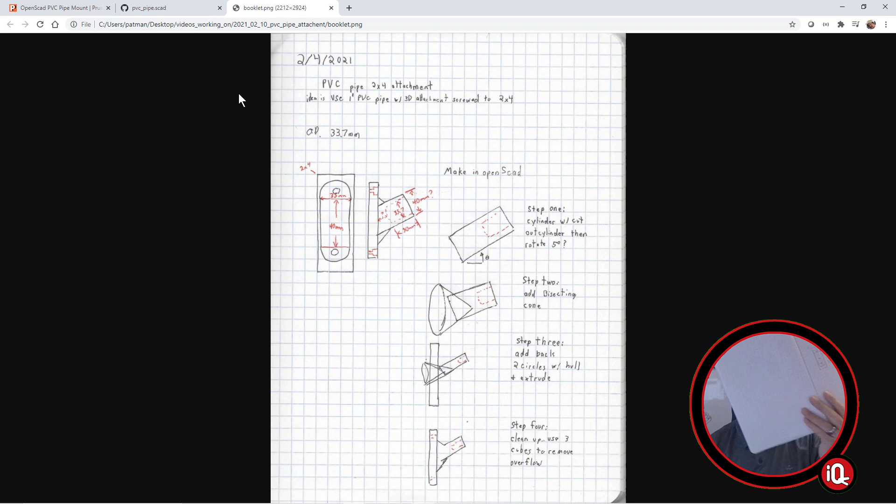So always, I think I've said a few times, draw some ideas in a booklet, keep track of them, because I think it helps you with your timing. When you're trying to design something, it can save you a lot of time, kind of give you an idea. So in this case, I was actually trying to plan out how I'd do it in OpenSCAD.

So you can see here, what I was talking about was like, hey, let's do a cylinder at an angle, and then remove a cylinder from inside. But then also, maybe it'll show up better here. Like here's a cylinder, but then it goes at an angle here. I thought, hey, I need some reinforcement. Let me put a cone shape in there, and I'll have that cone shape go through, and then I'll add the backing, and then I'll come back and mathematically subtract the parts.

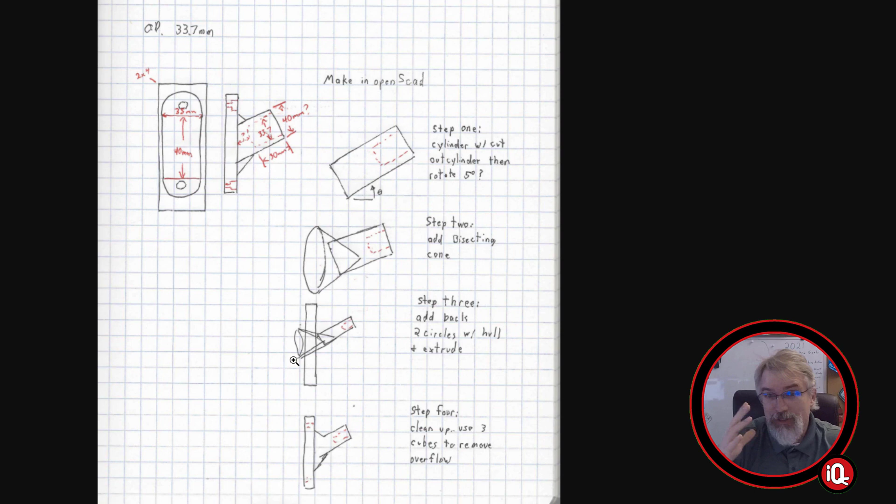And so that's what I did, but it proved to be a little more difficult than I thought, but I did get it working. So I will go over the OpenSCAD at the end here, for those who are interested and want to see how it was all put together. But the OpenSCAD is adjustable, so if you have a different PVC pipe, you could change it. So it should be pretty easy to do that in theory. But with that, let me go over the numbers.

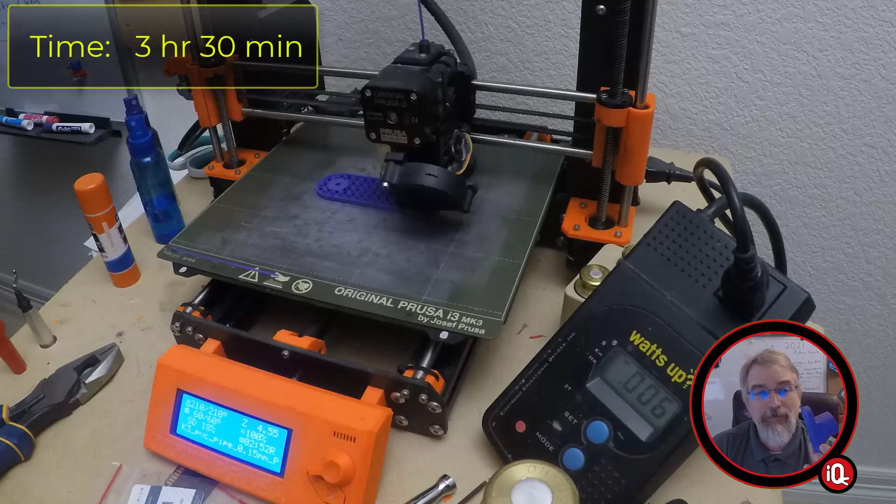So here are the numbers. This took 3 hours and 30 minutes to print. It took 3.2 cents worth of electricity, and it weighs 0.028 kilograms. And at $20 per kilogram, it comes up to 56 cents worth of material. So all in all, it cost 60 cents to print this. So not a bad deal. And I think it's going to work pretty well in my basement. So boom, pretty simple. I like it.

So with that, let me go show off what I can in the basement, even though I don't have the shelves up. I do have an example screwed into a 2x4 on the wall, so I can kind of show off the idea. So I'll go show that off, and after that, we'll come back and show how to recreate it in OpenSCAD. Okay, so like I said, I haven't had enough time to build the shelves I want to build yet, but here's the idea. So I got this.

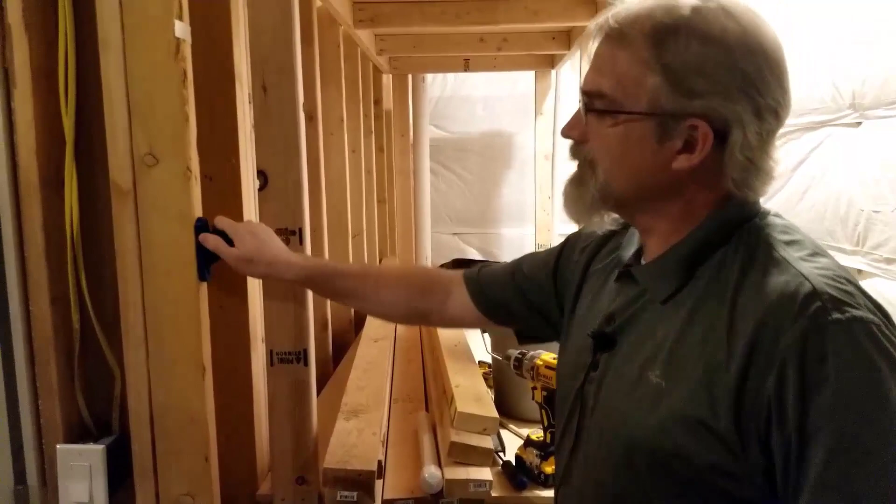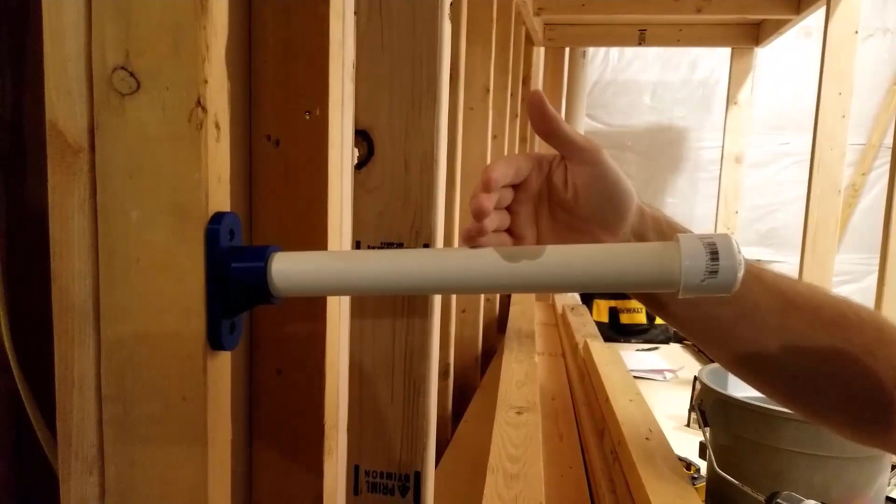The idea is I want to kind of screw these into a 2x4, and then we just can take this and it's nice and tight and firm, and so I'm going to have two of these that I can build. I don't have a good example here, but I have two of these, and I'll put something like this. The other one will hold it up.

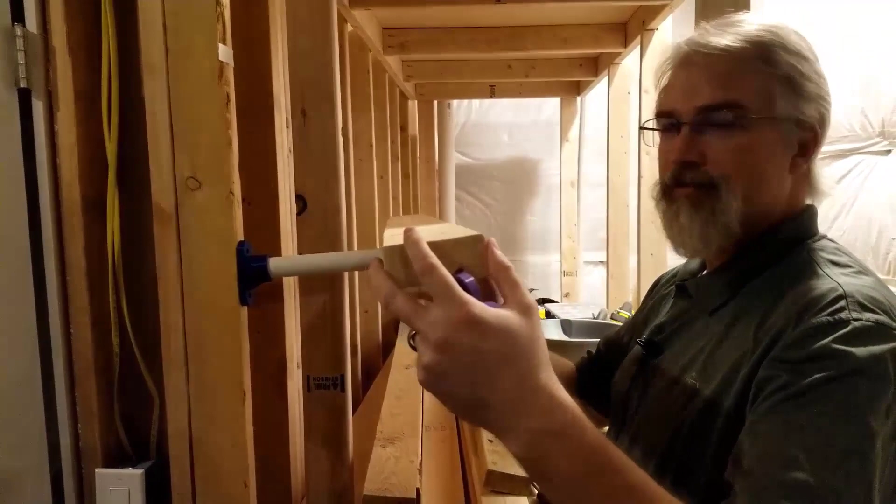Okay, so here is my current OpenSCAD file. So we'll just kind of go over it a little bit here. Now, this is one of those things, if I recall an old story, Osloy, who turned me on to OpenSCAD, sent me something one time, and it was really neat. It did a job I wanted to do, something with putting feet on my 3D printer. But some of the variables weren't perfectly adjustable.

So you could change the parameters, and the design would blow up, because it gets really hard, and I'll show how it gets really hard in this example. I'd have to do a lot more coding to make it universal, where you could make one change and it would adjust everything correctly. Versus what I have here, you can tweak a little bit, but once you go too far, you get out of the parameters of my design, where I did it simply, and it kind of blows up. But I could go back and redo the code and make it more complex to adjust for those things,

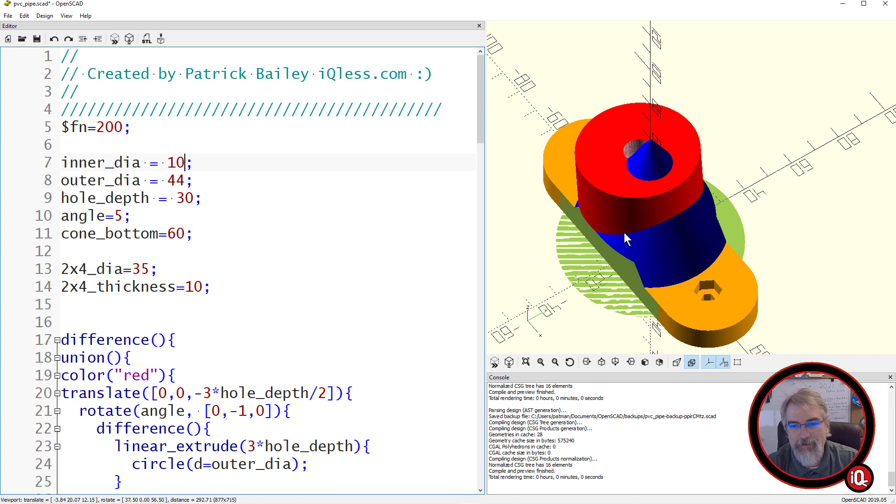but that takes time. So as an example, right here is the inner diameter, 33.7 millimeters. But if I change that, I can make it 10, boom, and we see that goes in here. But now you see that cone. I designed it to cut it off in the middle, but now it's poking through. So I'd have to make this design a little bit different to account for that. I could change the cone size, and the cone would shrink, and there you go. But now I just move the cone. So you see how it starts cascading the error.

So let me go back here. But let's say you were like this, and it looks fine. And let's say you want to go 3/4 that. So I say 3 divided by 4, multiply that. So I do a smaller pipe as an example. And see, that kind of works. But you can see this is still poking out a little bit. Maybe I could adjust this. Yeah, so drop that down to 50, and that kind of works.

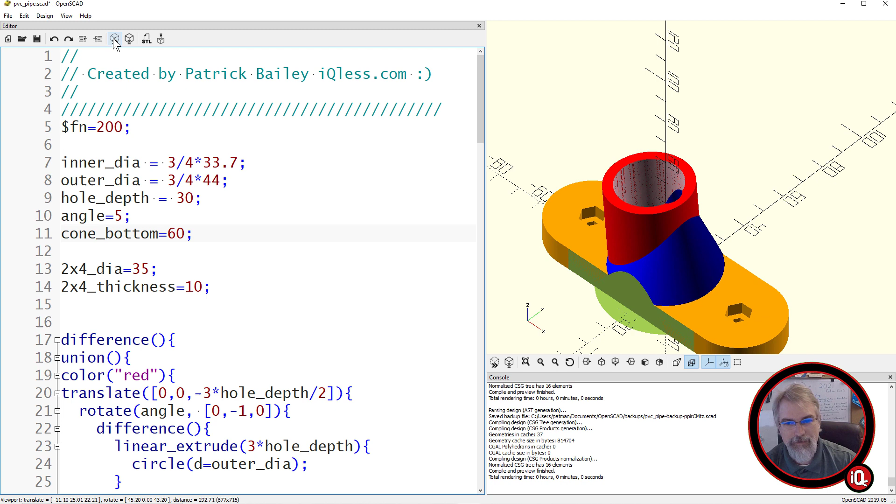So some things you can adjust, but for example, this cone popping over the top, I could have had another feature which cuts that top off, which I didn't do because I just wanted to get the job done. But we could take it as is. Let's say you want to do 0 degrees. That should, in theory, probably work. Yeah, there you go, 0 degrees. If you wanted 0 degrees, that seems to work pretty fine.

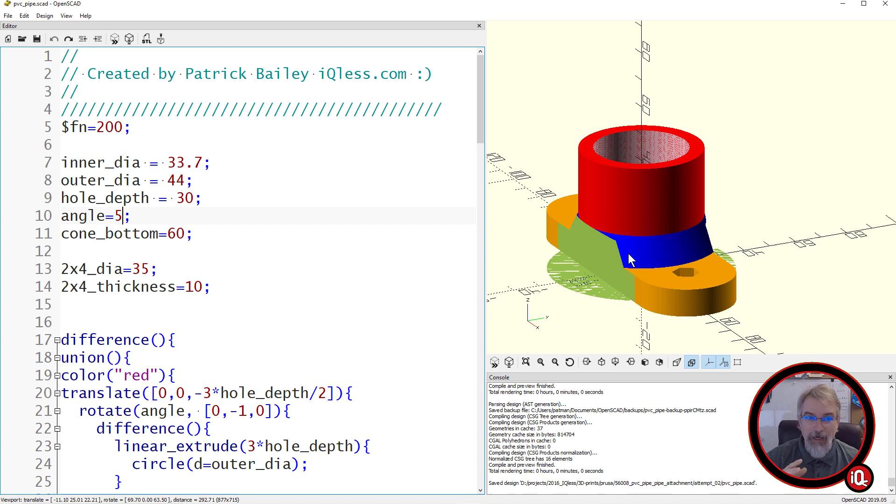Okay, just to show you the complexity of doing things in OpenSCAD. It takes more time to have a full design where you can adjust 3 or 4 parameters and not have it blow up on you. It's possible, but it takes more time. Okay, so with that, let me walk through the idea I had here.

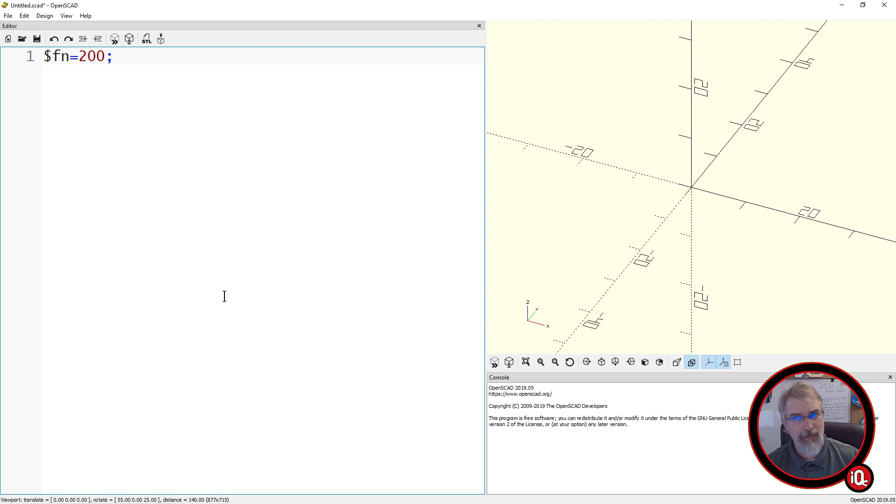One thing I had up here is $fn. For those people who aren't familiar, $fn equals 200. You can think of that as the fineness. Just to remind people, if you're using OpenSCAD, it's a good idea to open up their cheat sheet. openscad.org/cheatsheet should give you the cheat sheet. This $fn 200, that's how fine you want to do it.

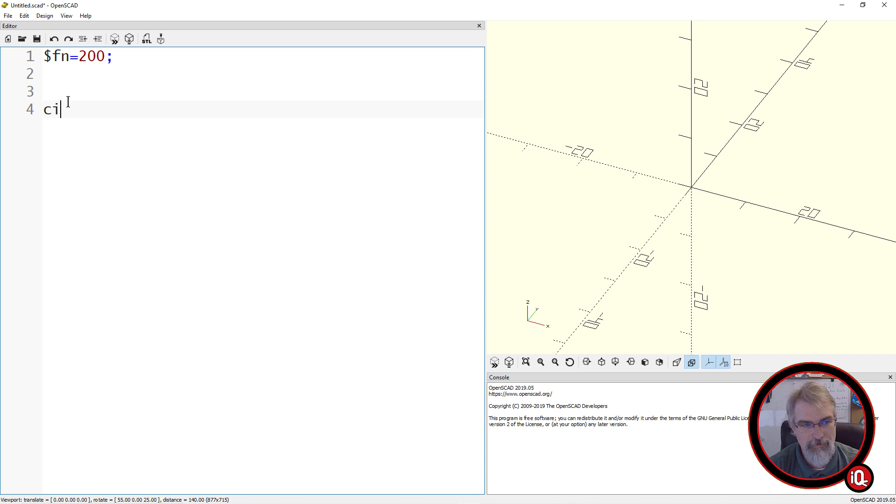So do I have a cylinder on this one? I did not do a cylinder. Let me just do a circle. So if I did a circle of 40 as an example, boom, I get the circle. Now if I drop that fineness down to 10, I got 10 sides.

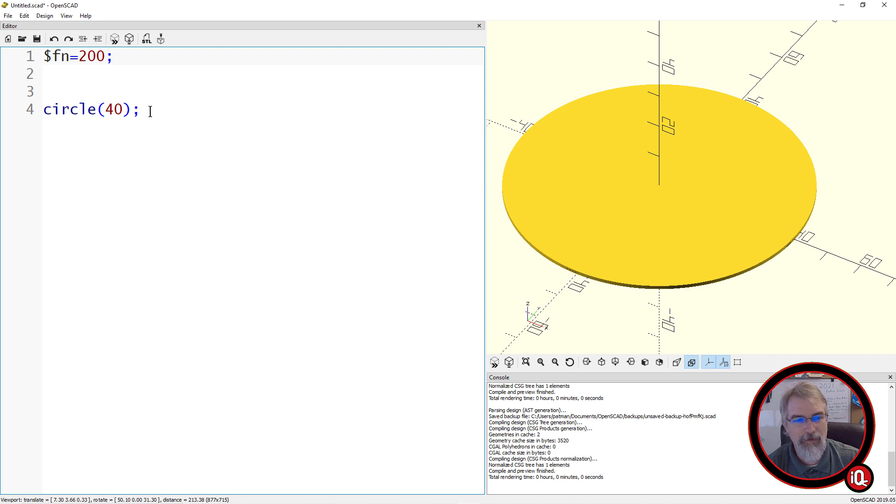So that's, but it takes longer to render. So at some point, you might want to leave this low, like a 10 or 20, if you want to render things quickly. Then when you're done and you're ready to do your model, pump it up to 200, just so you can get that more fine result. And also, per object, you can actually adjust it, which I had to adjust on one thing here.

Okay, so with that, let me get started on a few things. So first, we'll start with the cylinder coming up there. Just to color code these things, I'm going to say color red. So everything inside of here is red. And then we'll do a circle, and we'll say D equals inner diameter. Well, let's do the outer diameter first. Sorry, outer diameter. Well, that's a variable now. We haven't defined it yet.

And we'll come up here and we'll start defining some of these. And so we'll say outer diameter. And I'll just go with the numbers I'm using right now, which is 44 millimeters. Oh, not 2 equals. And boom, we already have an error. So what did I do? Oh, did not spell circle right. It's always a good idea to write a little bit of code, test it, make a change, test it, make a change, test it. That way it's easier to find your errors. Okay, so we got our circle.

The next thing I want to do is we do want to do a linear extrude, because right now it's just 2-dimensional. In this case, I used a variable, 3 times the hole depth is what I decided to do. But you could make it just a number. And down here, I need to make my hole depth. And my hole depth, I said, equals 30. And that's how deep this hole is to go into here. So we run that. Oh, sorry, I did need to do that. There we go.

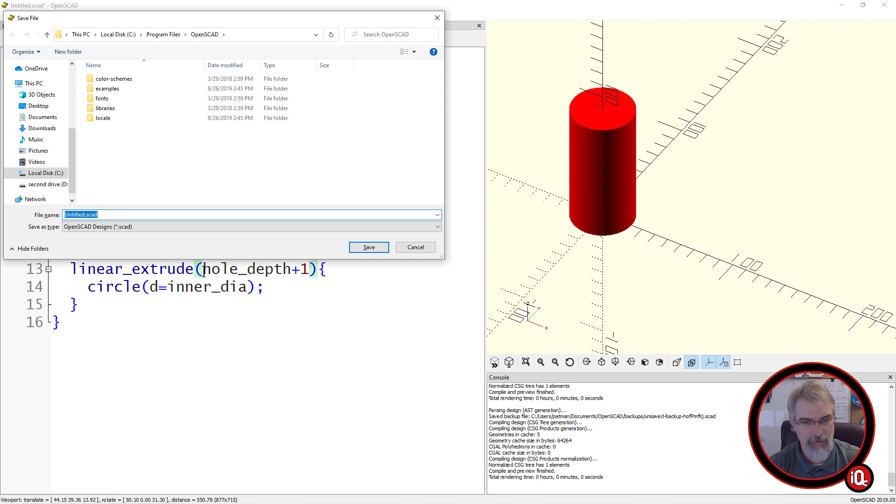And now I have the hole depth. So I'll say hole depth. That's how long I want to make it. But I'm going to add 1 to it just so I can use that to pull things around. Well, let me make it 2. No, make it 1. 1's fine because that means I'll just go above. Okay, so now if I run it, it did make it, but I can't see it because it's hidden inside of there. So now what I need to do is move that. So I'll do a translate, which will move that guy.

Okay, and then this is X, Y, and Z. X, we're not going to move it anywhere. Y, we're not going to move it anywhere. And Z, we need to move it 2 times the hole depth plus 1. Because here we're going 3 tall compared to how I made that hole depth. So here I'm going 2 tall, plus I'm adding 1 little more to kind of creep over the top. So now we can see how it's creeping over the top.

But then now we need to subtract them. So we'll make a difference. And there we go. We got this shape. Now you will notice this is much longer than I made, because my intention was to make this too long and then pull it back and angle it and then slice it out. So that's one reason I did this. Okay, so now the next thing I need to do is rotate it. So we'll say rotate, and we'll rotate this whole thing in place.

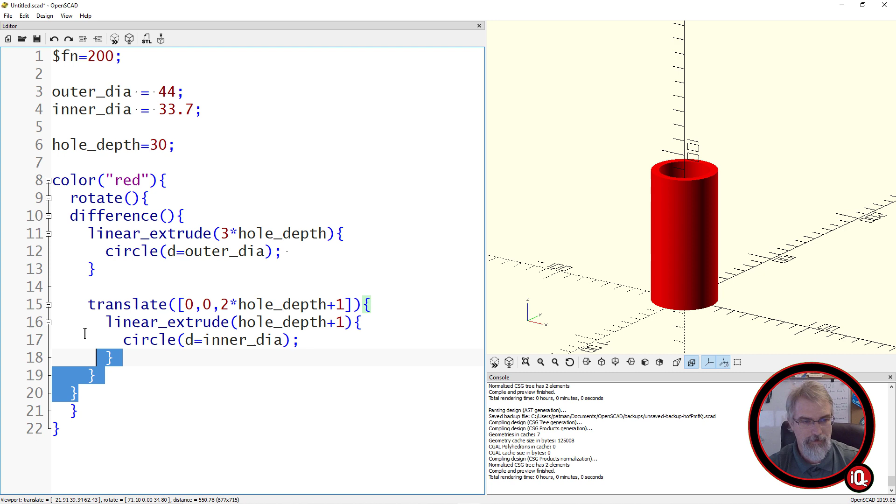Boom. Okay, and this is where it gets fun. So we can say angle, so how much we're going to rotate it. And then you can rotate this in different dimensions. You can do X, Y, or Z. So we don't want to do it in X, so we put a 0. And we do want to do it in Y. In this case, you put a 1 or a -1. Maybe you can do half variables, I don't know. And Z, we don't need to move it.

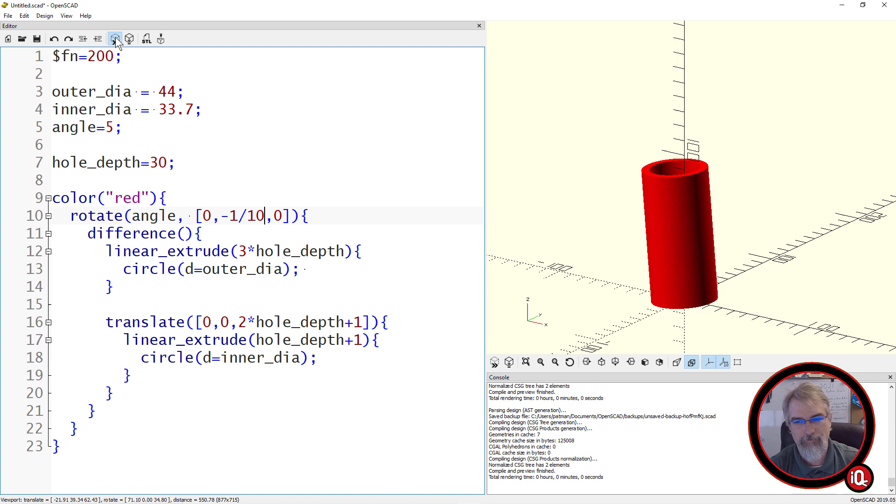So then come up here, we need to actually put our angle in. So I'll say angle. That way it's easier to change. Angle's 5. Boom. We see that we rotated the whole thing. Now if I did a 1, it would just go the other way. Boom. Now, can I do... never tried it, -1/2. Is it going to just do a little bit? Or it doesn't matter? Okay, I guess as long as there's a negative or positive value, that's how it works. Just never thought about that.

Okay, now we need to move this. So I need to move it down. Translate. Boom, boom, boom. Okay, and we translate it 0, 0. I need to move it down. I'm going to move it -3 times the hole depth divided by 2. That's just the number I came up with that made me happy. So now that pulls that down. Okay, so now that part is done except for the slicing of it.

So the next thing I want to do is we want to create the cone. So I'll go down here. And the cone is just going to be a simple cone. So we'll say color. We'll separate it in different colors. We'll call it blue. And then, did I write this one? Okay, we use the cylinder, cone bottom. That's how big the bottom of the cone is. And then how high it's gonna, let's see. Let me bring up the cheat sheet because I think I'm misremembering.

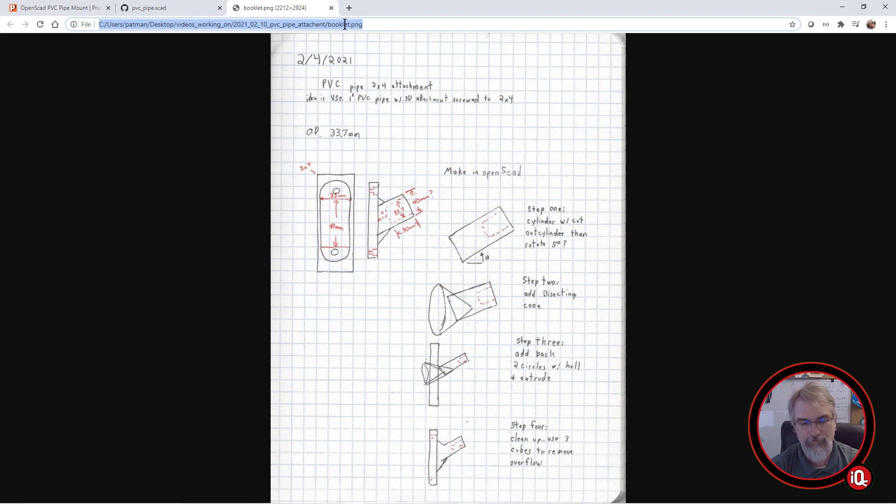Let me check. So there you go. OpenSCAD.org cheat sheet. Cylinder. Okay, and here we have the height, the bottom radius, and the top radius. Okay, so I kind of messed that up. Shouldn't actually be cone bottom. It should be cone height. What are you gonna do? It's not really the radius. Cone height equals 60, I believe. Yeah, look, fixing my own code already, right? And then we have bottom radius and top radius, and whether it's centered.

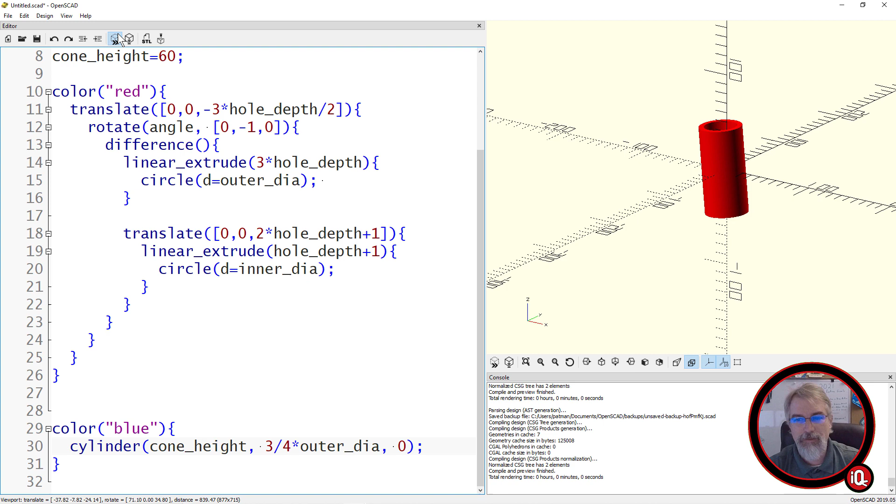So for the bottom radius, I'm saying 3/4 times the outer diameter, I guess is something I decided to do. Who knows why? And a 0 for the top. So it's going to make a cone shape. Big on the bottom, nothing on the top. And we should get our cone there. And you can see it's flat right there, which is fine, but you can see it's bisecting this just fine. And we need to eventually cut that out. So that's going to be a join.

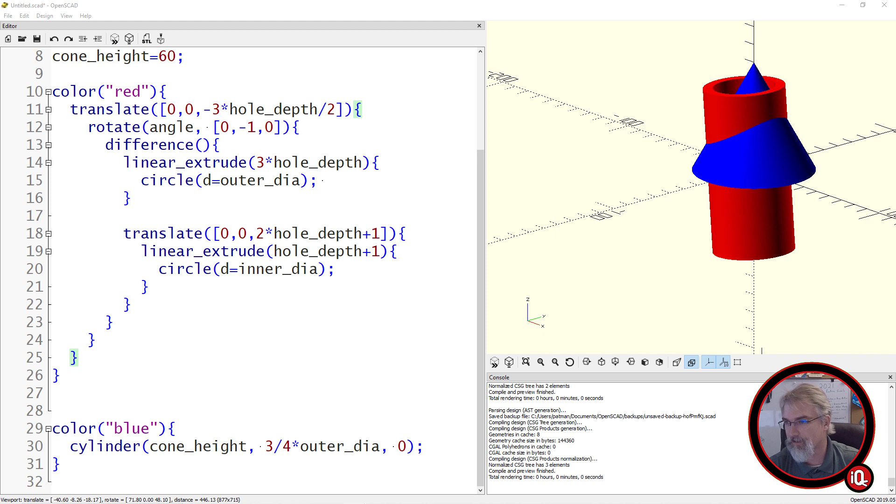Okay, now what do we do? Now it gets fun. Where's our orange? Purple, orange. Oh yeah. Now we get to the orange part. I'm probably not going to be able to complete all of this because it gets crazy. Okay, so now we do the bottom part. I probably should do a live stream of all this because it gets really fun.

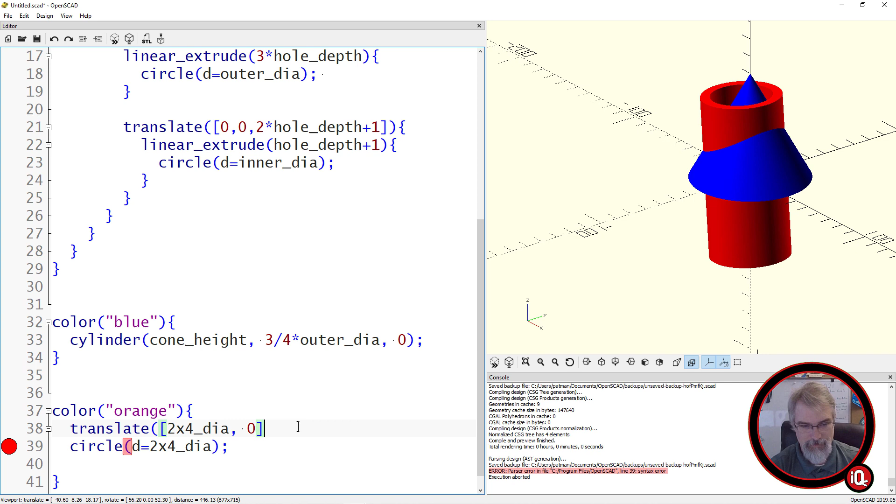Okay, so we're going to have a circle with diameter equals, I just called it 2x4 diameter, which is a real weird way of saying that. So for the 2x4 attachment part, my diameter is 35 and our thickness is 10. So we come down here and make a circle, which would show up down there, but I can't actually see it because it's too small. And then we're going to translate it. We'll move it 2x4 diameter and 0. Boom. Oh, and how about I enclose all that? So that one's over there.

And then we'll make a sister to it. So we'll do the same thing, but with a negative diameter, if I recall. Boom. We got that guy. And then we can use this cool tool called hull, which is going to attach both of them. So everything in there, we're going to make a hull. And if I do that, boom. See, now they're attached. So you got this nice big oval shape. And then I need to do a linear extrude.

And we're going to do that 2 times 4. Well, that's a variable, 2x4 thickness. Boom. So there we go. We got the basic shapes. Now comes all the subtraction part, which is fun.

It's just really fun. So that, I'm going to have to do copy and paste, otherwise it's going to get a little crazy. So the first thing we can do is for the 2x4 part. I can comment out this top section so it'll go away. So we comment that guy out. Now we've got that. So we're going to come down here and make some more shapes. I'll cut and paste these. So these are the screw holes.

So here I'm basically taking a cylinder. Here's a cool thing. I'm taking a cylinder of a certain size because this is where my screws are going to go in. But I kind of want to make it a hexagon. To do that, at the end of the cylinder I can specify $fn equals 6, which will make it a hexagon. So in here, I'm making 2 hexagons, a small one and a bigger one, and one's going to go up the whole distance and one's going to go up a little distance. That's why I have kind of an inset.

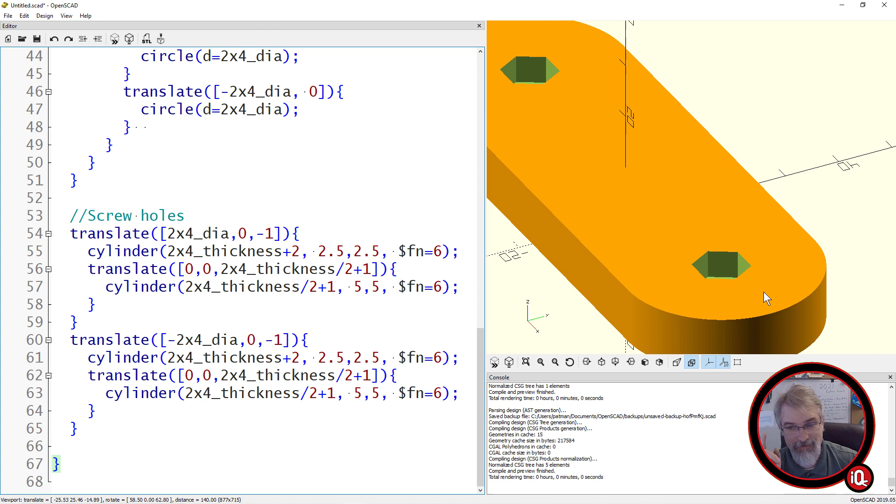And so then I will close this whole thing off, move this over, and on this I'll make a difference. Because what I'm going to say is, hey, take this guy and then subtract these screw holes from it. And boom, now we got those. These inside are cylinders, but they're 6-sided cylinders, which makes a hexagon. One goes all the way through and is the smaller one, and one goes part way through. That way I can use my wood screws and they'll go in. So there's that.

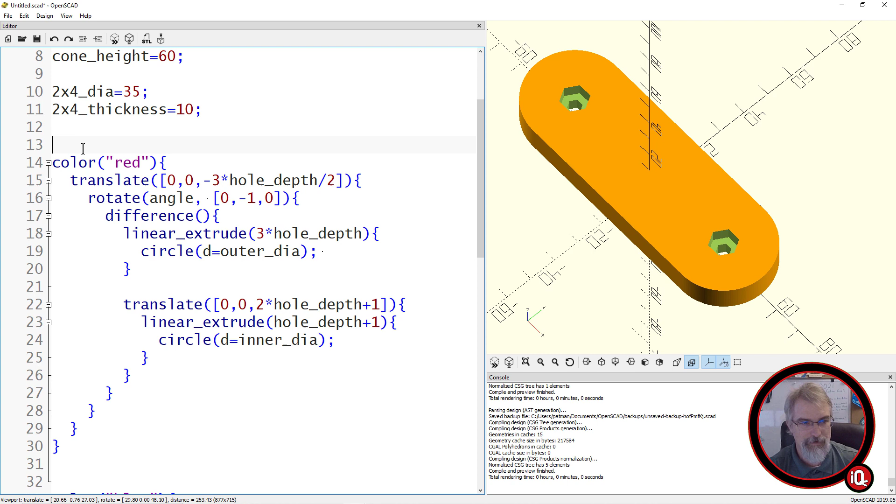Now, if I bring everything else back, boom. So now I got to start subtracting all the rest of it, and that's where it gets complex. I don't want to make this video too long and belabor it. So really, the easy part, if you look through the code, I make a big square and cut off everything in the bottom. So that guy gets cut off.

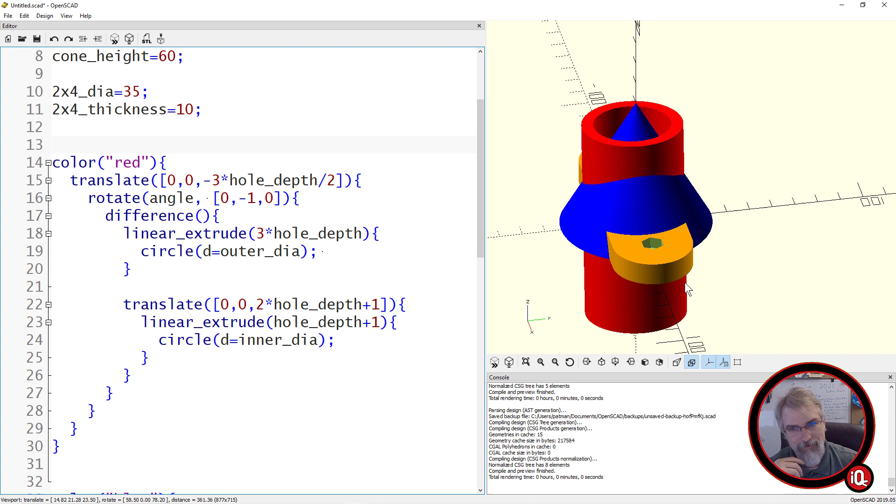And then I also make some polygons to cut off the side here, because you can see in the end product, there's a little angle here. So that angles up. I have a little polygon on both sides that has a linear extrude and cuts the whole thing out. And then the fun part is this cone is inside here still. So basically I have to recreate that cylinder in the middle and subtract it again. Now there's other ways to do it. I could have waited to subtract it to the very end. But you can see how it starts getting complex. So I got it done and somewhat adjustable, and I like it.

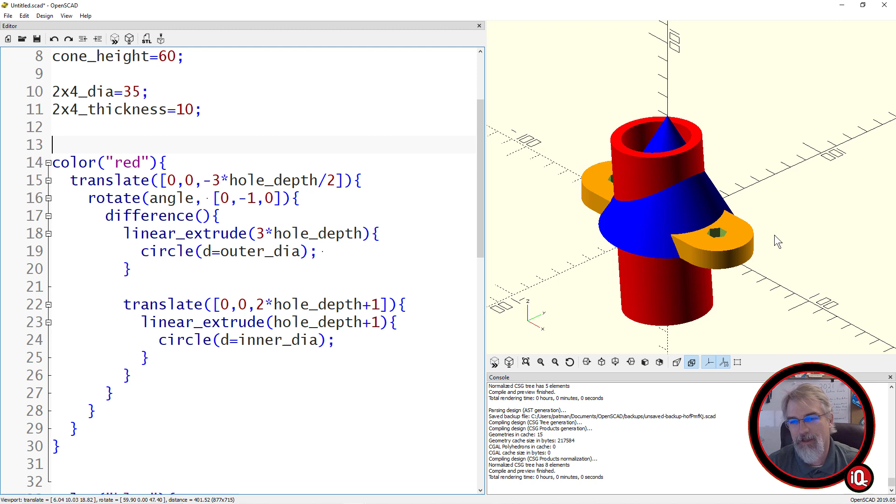But either I need to go to the next level and code it better, so it's much easier to adjust based on whatever pipe size you want, or it's probably an easier thing to do in Fusion 360. Maybe I'll come back and review that. It'd be nice, if I get some time, to do a live stream and go through redesigning both of them, showing how to do this, and then showing how it's probably a lot easier to do in Fusion 360 for this particular thing, which I didn't think would be this hard. But it's interesting to programmatically do this and add and subtract things.

So, okay, that's as far as I can get in my time allotted, so I don't want this to go too long. But anyway, hope you found that interesting, and if you need to stick a PVC pipe on your wall, there you go. I like these practical prints. Better life through 3D printing.